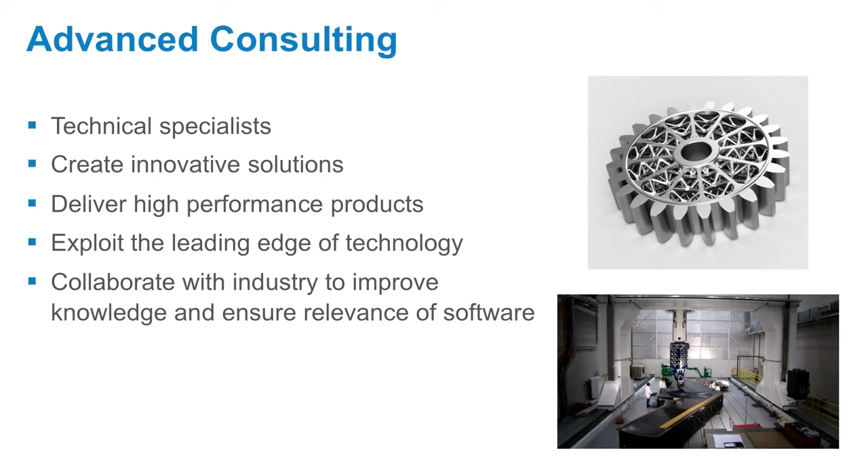By collaborating with industry, we're improving your knowledge and also ensuring our software stays relevant. So here are some of the areas we work in: adaptive manufacturing, robotics programming, additive manufacturing, build verification, inspection, composites design and manufacturing, sheet metal nesting, and we also do subtractive manufacturing.

In my team particularly we work on the additive side, and as part of that we do a lot of design: topology optimization, lattice optimization, generative design. We're going to learn a bit about both of those today. We also do build preparation, additive build simulation, and some material science and testing.

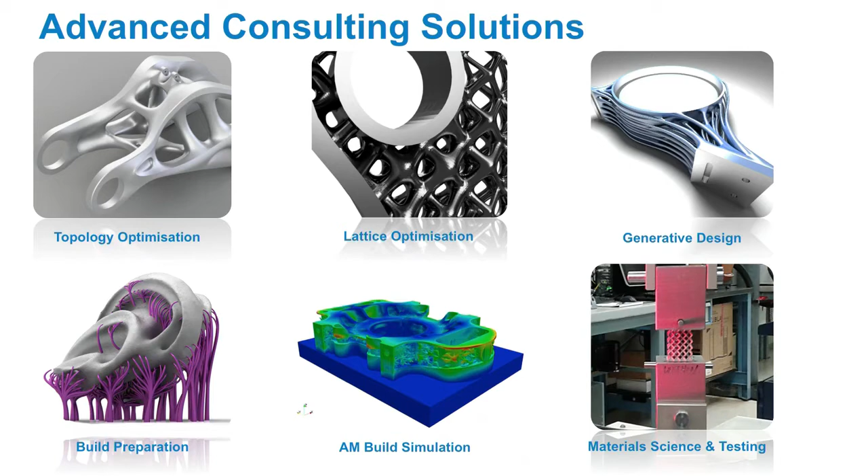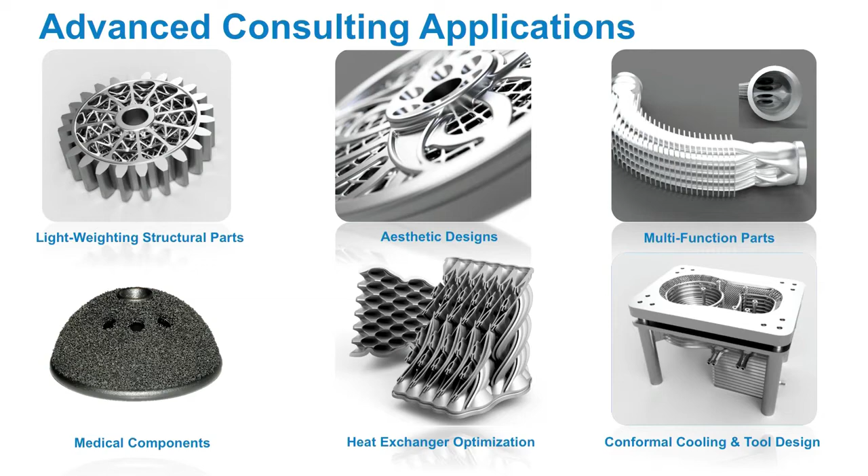So these are the main areas we work in: lightweighting of structural parts, aesthetic designs, multifunctional parts, automotive components, aerospace, medical, plus other areas. We also work on heat exchangers and tooling.

Great, and I hail from a different research wing of Autodesk over at Pier 9, which is a 27,000 square foot research facility we have in downtown San Francisco. I'm a principal research scientist there based on our Netfabb team, looking primarily at how we can use additive technologies in a way that is both economical and practical. There's a lot of excitement around these technologies, and we're spending a lot of time looking at how we can use them very strategically.

So at Pier 9, it's an interesting facility, one of several digital fabrication workshops we have around the world. We have a focus on digital fabrication, robotics, and we do a lot of workflow research. One of the more interesting things we have is a residency program to bring individuals from industry in to work with our new generative design tools, to work on manufacturing, as well as to work on some very social impact challenges.

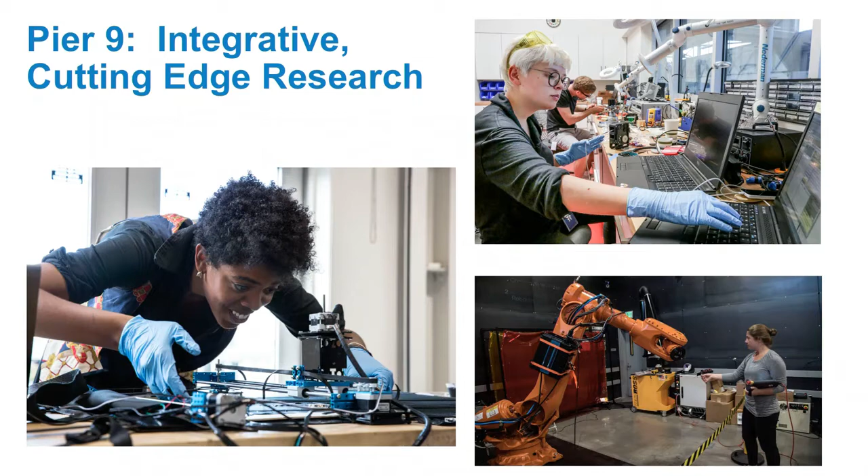One of the most unique things about the research we do at Pier 9 is it's really focused on integrative and cross-disciplinary work. We're looking at new ways of training robots, new ways of making robots build structures, new ways of embedding computers on the body via conductive textiles and embedded computers. We're really looking at how we can combine existing technologies and advance them with just little leaps in combinations.

So today we're going to be talking about one of these combinations of new technologies and old technologies. We're going to be talking about metal casting, which is the technology used to produce every part on the table. There's no 3D printed parts on this table. Afterwards, during Q&A, we'll pass some of these around so you can handle them, take a closer look.

So Andy here is going to give you guys an overview of some of the generative design and lattice optimization capabilities that we're leveraging to really drive this manufacturing process. And I'll be talking a little bit more on the manufacturing side about how specifically two metal casting processes work, and some of the design considerations for actually making parts for both investment casting, which is what was used to make this magnesium lattice seat frame over here on the right that Andy designed, as well as sand casting, which was used to make the LS-218 swingarm down on the show floor, which you'll all be able to see later today, as well as a small prototype Hack Rod chassis up here.

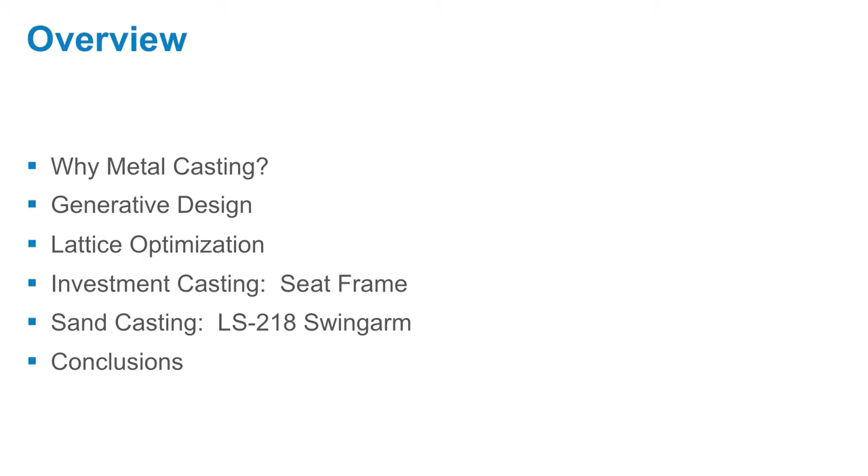So with that, I'll hand back over to talk about why we should actually look at metal casting. It's a 5,000-year-old technology, and for all intents and purposes is associated with a lot of old, crusty, heavy industrial equipment. But in fact, we all flew here on airplanes with engines made out of investment cast parts. Most of the hot stage components of turbines are made out of investment cast parts.

So it's actually a pretty interesting technology. And when we take a look at what's been driving a lot of the excitement around metal printing, we see that it's a lot of excitement around part consolidation, around these very high performance structures, very difficult to make geometries, and then a lot having to do with agile manufacturing.

And if we break that down, we're looking at value generation through design and value generation through logistics. And what's exciting is when we look at those three design headings, that actually overlaps really strongly with the capabilities of modern metal casting techniques.

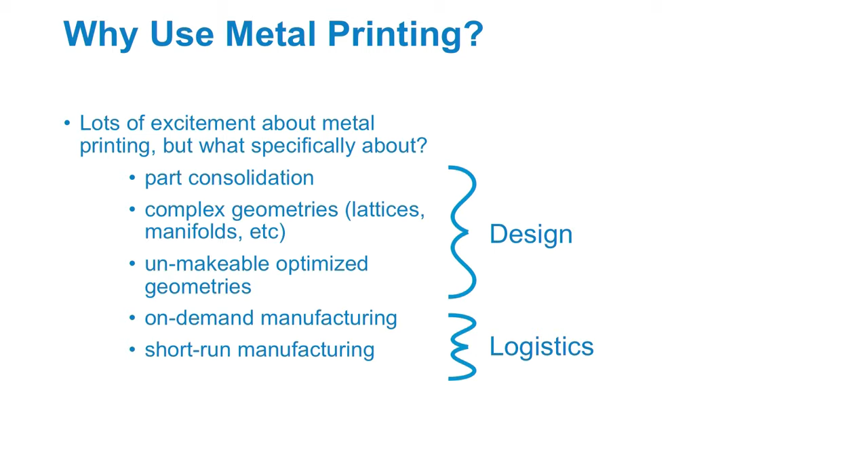So metal casting is a $35 billion industry. It's widely distributed. Most interestingly, it's a well understood process. It's a mature manufacturing process that produces parts that are certifiable, that are qualified for aerospace and medical use.

And it offers a huge portfolio of materials, hundreds of different alloys. So a much wider variety of materials that we can work with than can currently be used with conventional metal additive. Additionally, it also supports custom materials, so you can formulate materials for specific applications. So there are a lot of really interesting things going for casting, including the fact that it can make incredibly large parts.

So really the three technologies that we're talking about combining today are generative design optimization and using 3D printing, not as the end part manufacturing process, but really as a critically enabling technology to capture that geometry, and then using metal casting to actually realize that geometry in a material of interest.

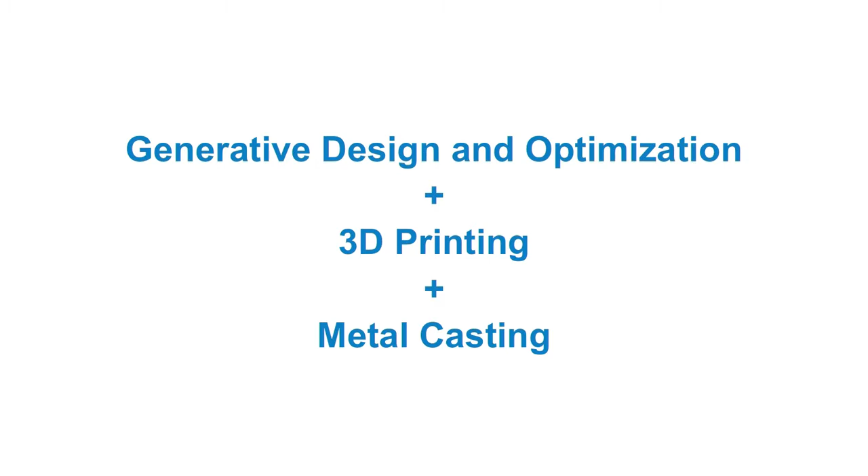So with that, I'll hand things over to Andy to give you guys a bit of an overview of our generative design and optimization capabilities.

So we're going to see a bit of generative design, basically a piece of software that is currently on tech preview. So the idea behind generative design is quite simple: it's define, generate, and explore.

So we start by defining. What we have here is a suspension upright. We have the green bits, which are our preserved regions. We have the red bits, which are our space claims. And what we do is we set up our structural loads on there, and then we work through our manufacturing constraints.

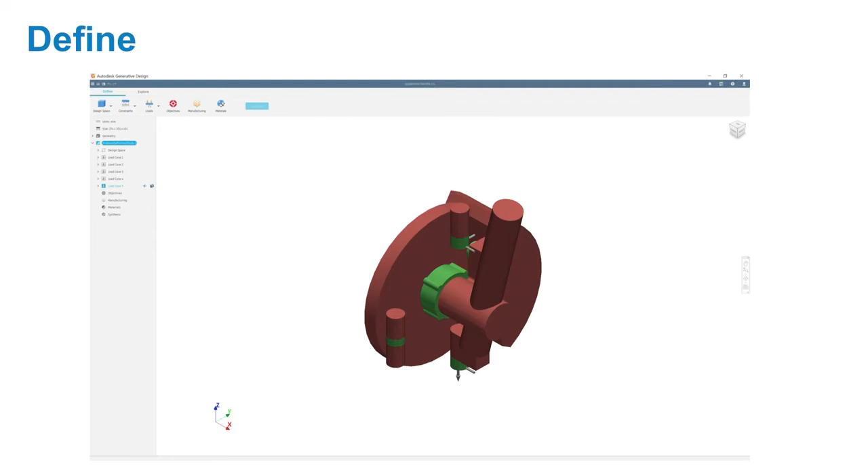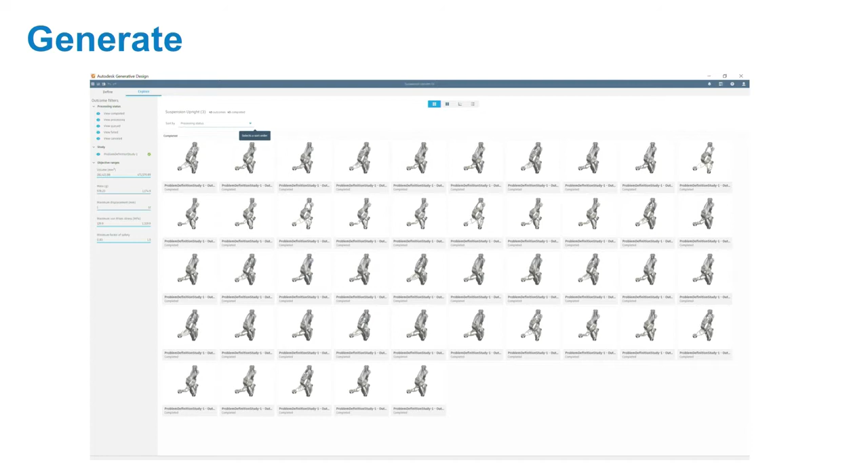Our material options, and basically we then generate quite a lot of solutions from that. So in this case, I've generated 45 designs. So from that, we need to basically work out what are the ones that best meet my needs.

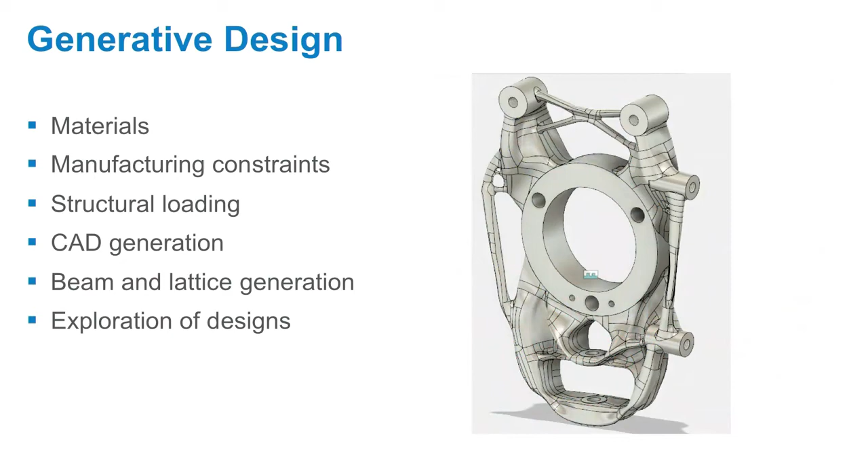So this is something that we're using generative design to do within the advanced consulting team. We're looking at comparisons of materials, manufacturing constraints, applying structural loading, generating our CAD from that. We can also look at beam and lattice generation. And one of the main benefits of the software is exploration of designs.

So here are some parts that I designed from this. We have 3 different materials here, so we've got 3 different designs. These solutions, we could additively manufacture, or we could even cast them as well.

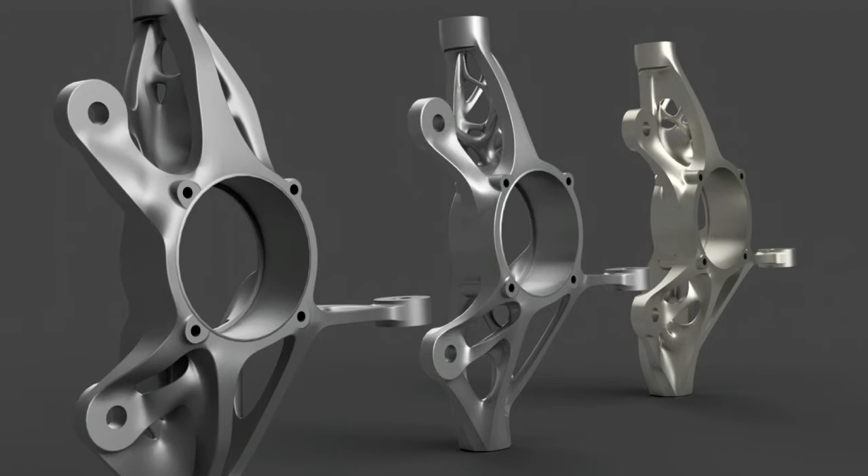So here is another suspension upright for a high-performance vehicle. It's looking at the rear of it, looking at the front.

And this is a structure used for the handlebars of a BMX bike. This bit in the middle here is actually developed using the Autodesk Monolith software, which is a multi-material generative design software. But the bit on the end in silver, that is what was generated through generative design.

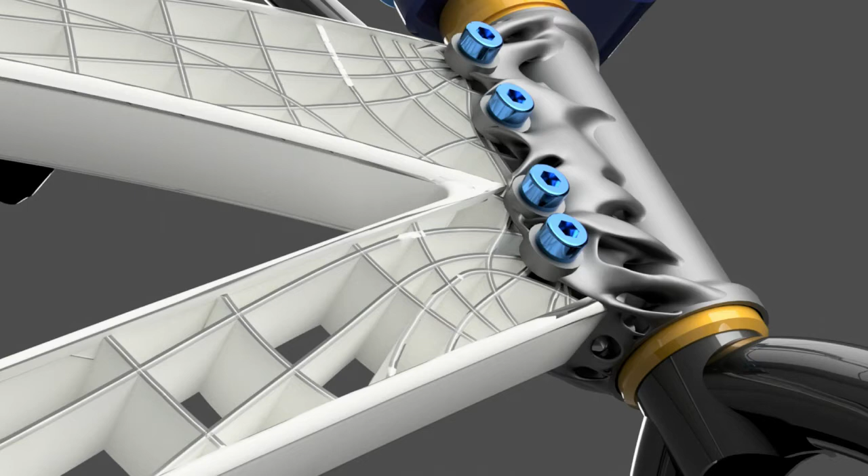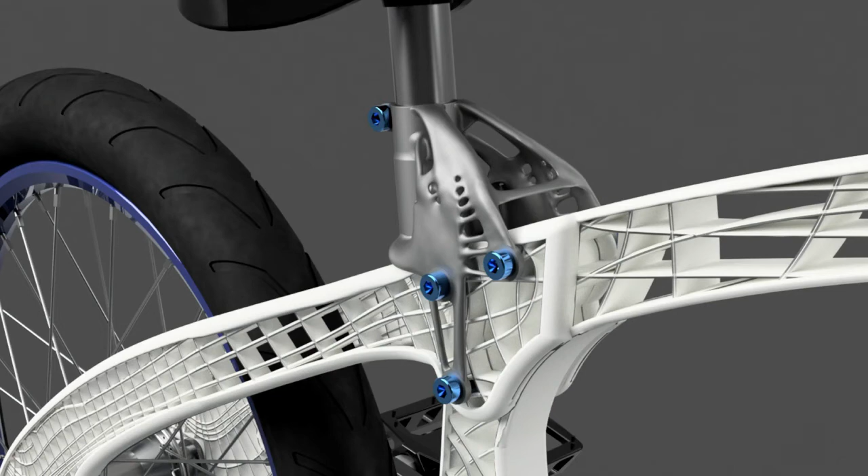It's another image. So here is the same bike, but with the seat frame now. That's the entire bike.

And we actually manufactured this. So it's got a composite polymer frame with 2 aluminium structures for the seat and the handlebars.

We can use this software to also do architectural designs, so don't think just automotive and aerospace. We can do some very cool things with architecture.

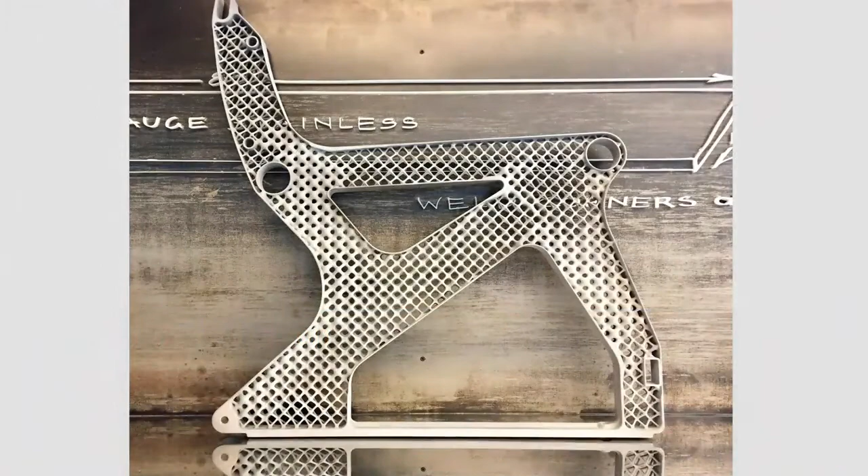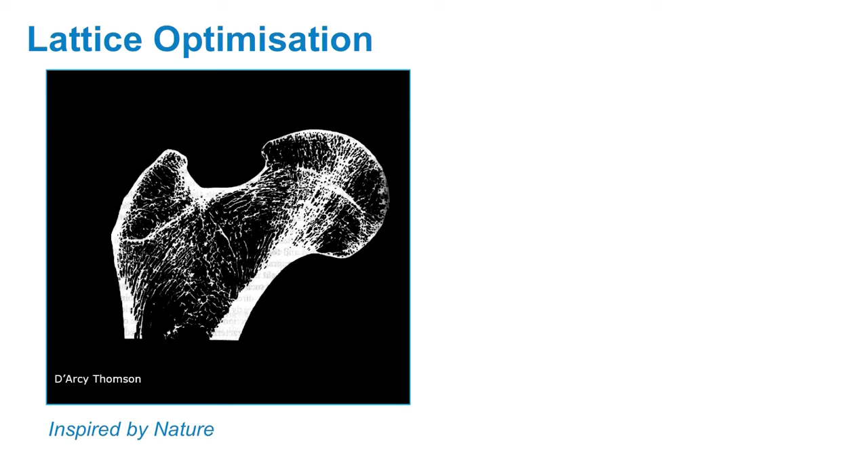So the idea behind lattice is basically inspired by nature. We have an X-ray of a femur bone, and you'll see inside there we have a very porous lattice-like structure, and around the outside we have a varying thickness skin. This is basically to enable you to have very high stiffness and low density.

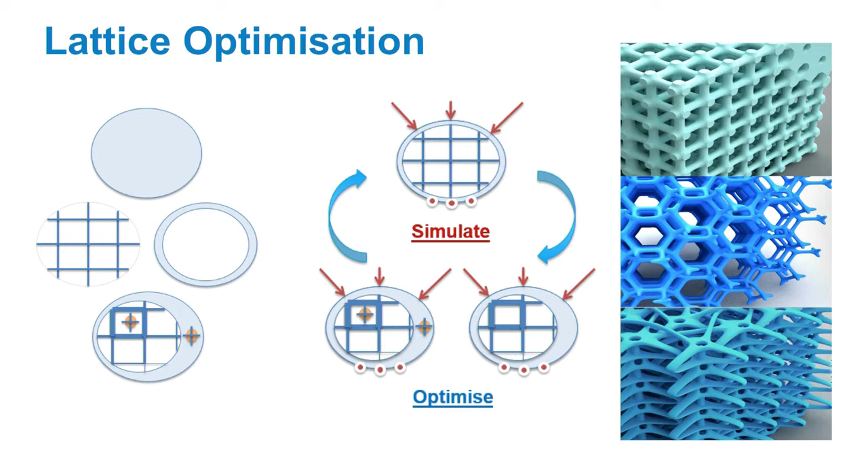So the software that does this is Netfabb. In Netfabb, we're able to define a lot of different lattice topologies. We can build our own custom topologies in there, and we can manually optimize those here, or we can automatically optimize using our structural loads. And this is all being done through Nastran.

So the benefits of lattice structures is you can get thin wall structures, so they're all supported with the lattice. Lattices will limit crack propagation, so if a beam fails, it does not propagate through the entire system. You can get very high second moment of area, which means very high bending stiffness. You can get very lightweight designs.

And during the additive manufacturing process, you'll notice that the residual stresses in the part are a lot lower, so you get a lot less deformation. And you can control the structural behavior of the parts. So you can create very interesting features such as negative Poisson ratios, so there's auxetic type structures. You can control exactly how the structure behaves in certain ways.

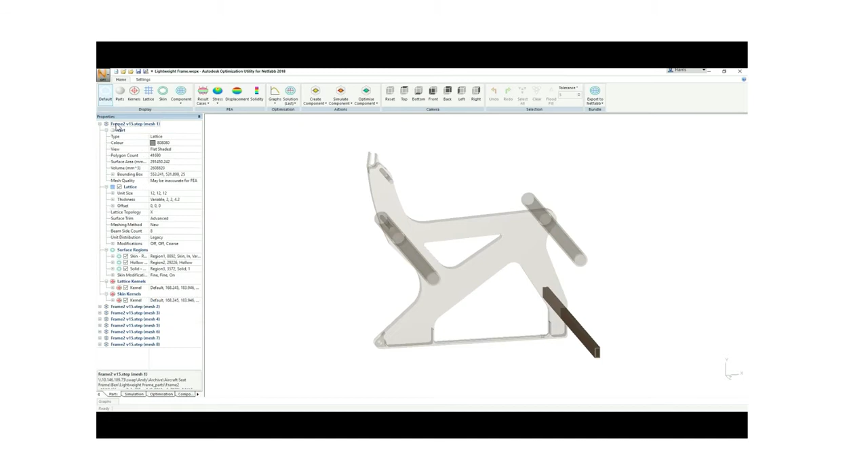So I've got a video here. It goes quite quick, but I've got some stills of this afterwards. So what we're doing is we've brought in our parts as a multi-body component. We're setting up our bits that are solid, setting up bits that have got lattice in there, and setting up the range that those operate within - the upper and lower range of the thickness that it's going to operate between.

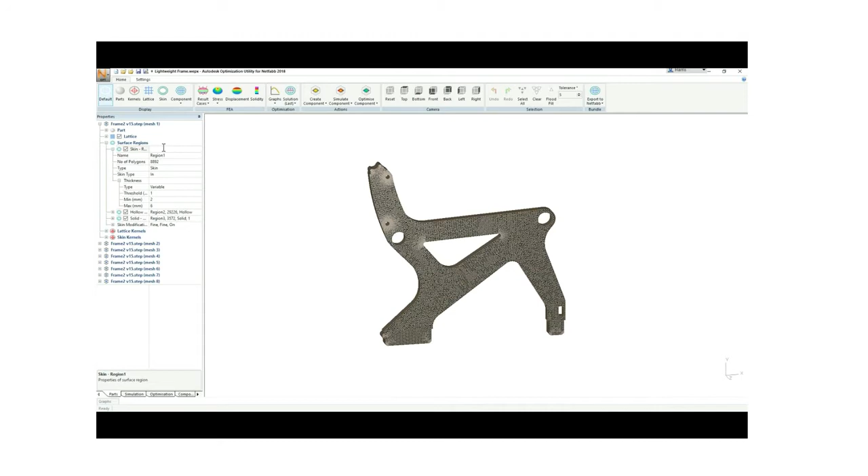And I'm just setting up the skin thickness now. So you can just see there, it's just around the outside. So that is the unoptimized structure.

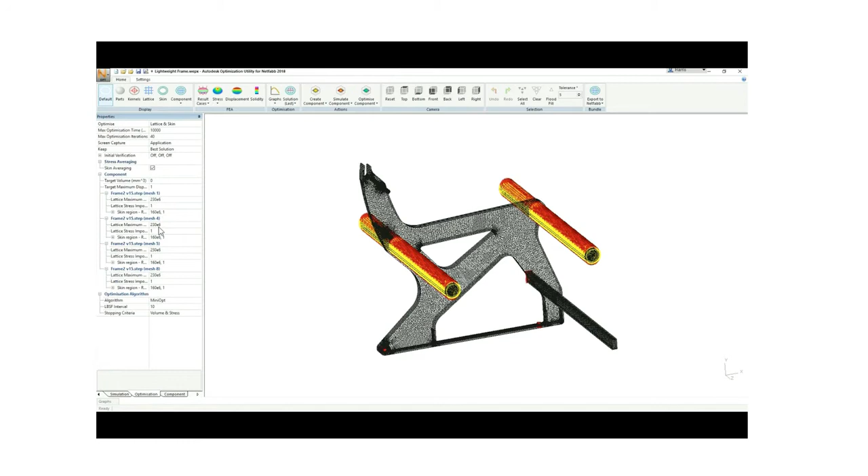So I'm setting up the boundary conditions. So I've set up a symmetrical structure here. We're imagining 3 seats, 2 seat frames. The loads are on all the bars, so your seat's on the lower bars, the seat back is on the upper 2 bars. And I'm setting up a number of load cases for this.

So just to show you a little bit more clearly - on the left here, we basically work down, developing our range of lattice thickness, and we set up the skin thickness. So you can see here, a little bit more zoomed in. I can set up the cell size as well, and I can stretch that in any dimension I want.

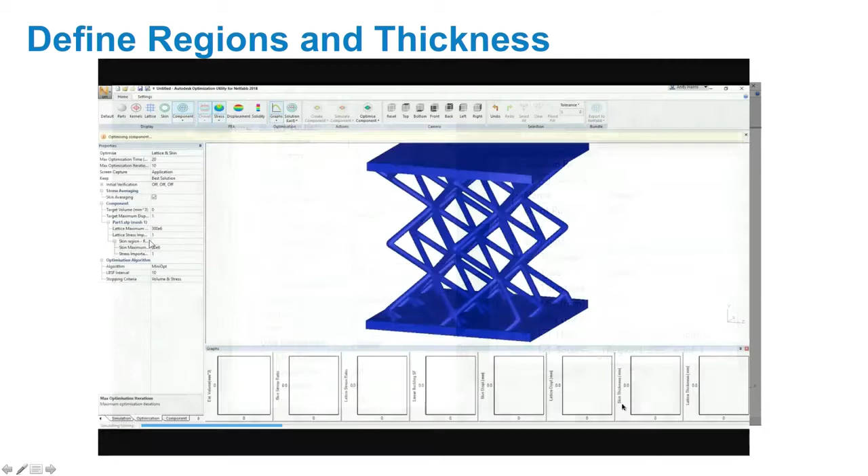And then we can optimize the thickness of this. I can also set up the surface thickness. So it just gives you an idea of what happens during the optimization - it's varying the thickness of the skin and varying the thickness of the lattice.

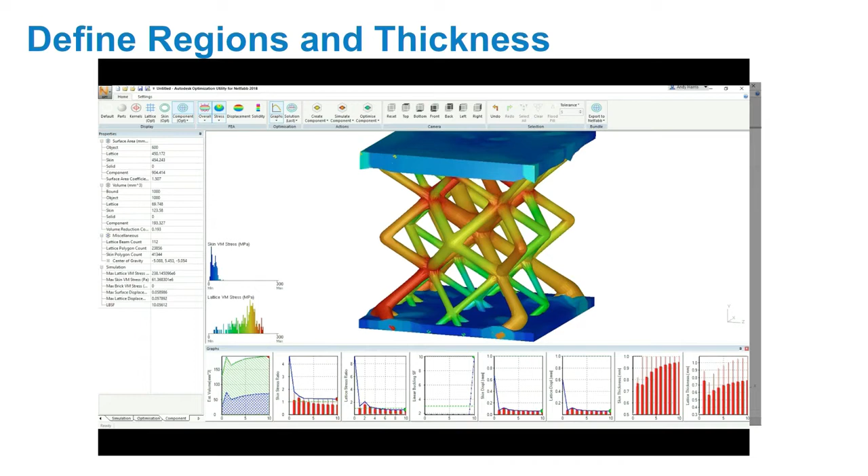And this is a final part, but you can come and see this one up here. So part of what we do in our team, we also do verification of the models. We can generate these solutions very, very quickly using Beam and 2D elements, but we want to verify that these really are the stress that they are actually at. So we do a 3D mesh of this geometry. You can see here a very highly detailed 3D element model. And we verify the stress - it is a lot lower than the yield.

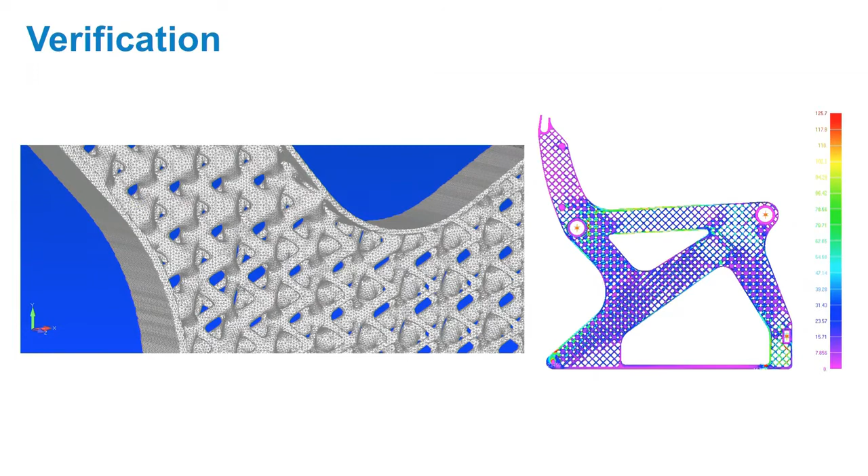So I'm going to pass you back to Andreas.

All right, so we're going to talk about how we actually made this seat frame, and it's worth noting there are very few metal printers in the world that can fit an object that large. Just quoting it out at someplace like Proto Labs, we would have had to chop it into 4 different pieces and then figure out how to weld together all of those lattice nodes afterwards, which just isn't practical. And likewise, we certainly can't use materials like magnesium in metal printers.

So the investment casting process, it's a positive mold process. You basically make a sacrificial copy of your object in a material like wax or plastic. And then you take usually multiple copies of that object, put it on another piece of wax called a tree, and you build up a ceramic shell - basically build up a temporary mold around those wax patterns.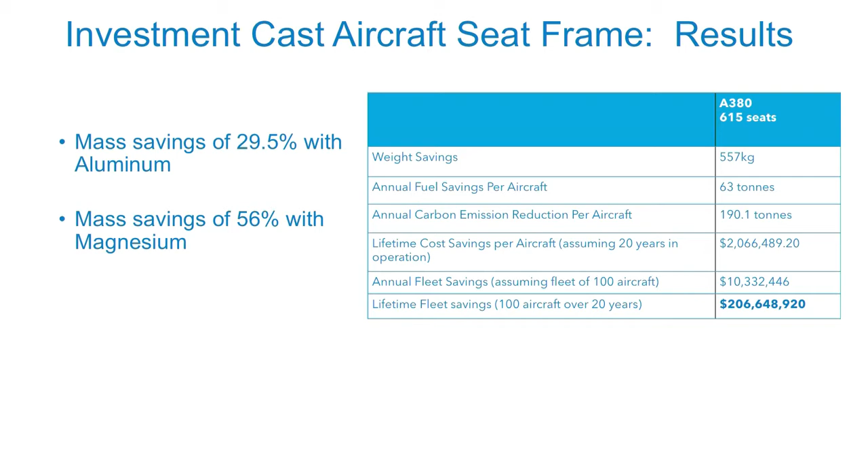If we take a look at a seat frame, it's a relatively small part, but there are hundreds of them on commercial passenger aircraft. Looking at some of the biggest aircraft and fleets in the world, say Airbus A380s, which have a little over 600 seats and kind of maximum passenger capacity, we end up saving a little over $200 million over the lifetime of a fleet of, say, 100 aircraft, which is pretty exciting.

Looking at the costs, this was one of the things that's pretty exciting. Casting's pretty cheap. This is about 3 times cheaper than a conventional metal printing process, just in terms of looking at laser time. So at prototype quantities, we're looking at about $4,000 per seat frame.

When you start to run the numbers on making larger quantities of these, what's interesting is you can pack these volumetrically, which is another economy of scale you can't achieve with metal printing, where you don't really do much 3D packing. You can actually pack up to 80 of these seat frames into those VX1000 build chambers. It takes about 72 hours to print the entire chamber, but you're averaging a little under 1 hour per pattern. So we're actually moving through this process pretty quickly.

Additionally, the general impression in the industry is that casting is a very slow process, but that's only slow when you're cutting tooling. It's actually extremely fast. You can go from printed pattern to part in about 8 hours using some of the modern high-speed investment casting shelling techniques.

There are certainly a lot of interesting characteristics of the casting industry. There are a lot of misconceptions around the turnarounds and lead times that are largely holdovers from using conventional subtractive processes, which are really the rate-limiting step when you're making tooling for, say, molds for wax parts or tooling for sand molds, which we'll talk about in a minute. That being said, typically you're quoted about 3-4 weeks for investment cast parts, but oftentimes if you pay an extra 15-20%, you can get turnaround times as low as 2 days.

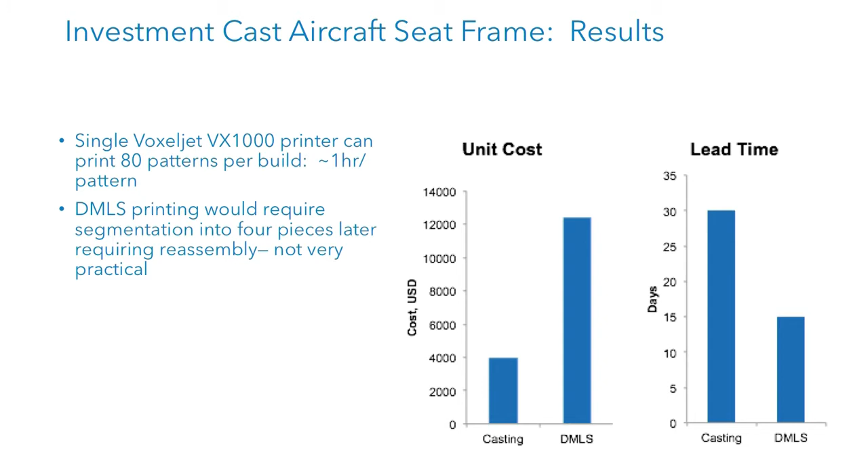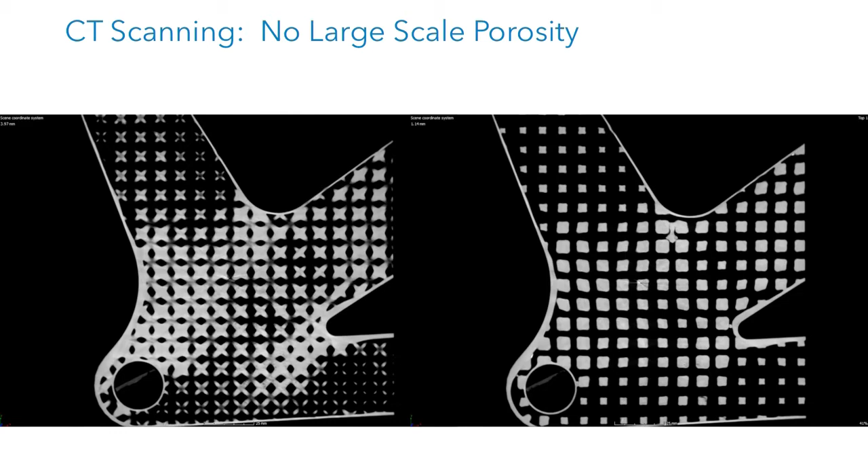So it's pretty exciting. We also ran some of the castings that we did through a CT scanner and X-ray just to check for some of the traditional casting defects. What we're looking for here is porosity, which can manifest at a couple of different scales, but we're excited to see that there's no visible porosity using existing conventional inspection techniques.

In terms of actually designing for this process, this is a little bit different than designing for, say, a direct metal additive process. What's important is that you have to design for the entire process, for everything that's going to occur between CAD and finished parts. The joke in the casting industry is that people don't buy castings, people buy parts, and a lot has to happen to a casting to get it to be a useful part. So in addition to designing for your functional requirements during service, you also have to design the parts with shell buildup in consideration, shell removal, design for the actual casting process, as well as consider heat treatment and machining steps.

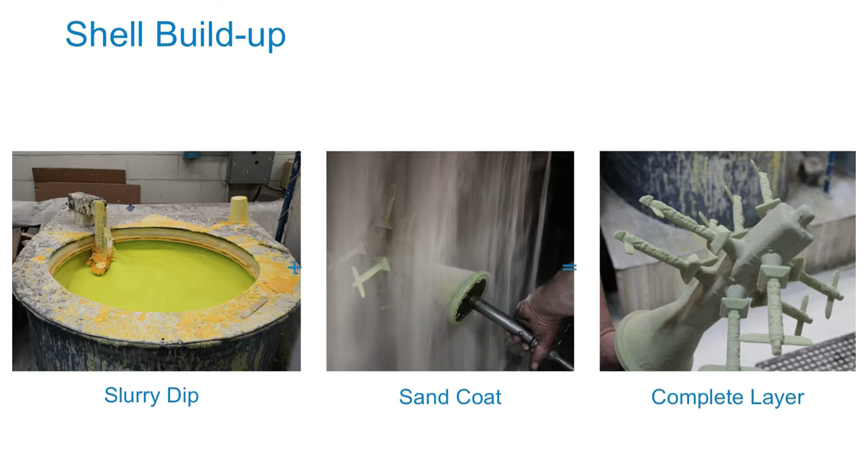The shell buildup consists of that slurry dip and then that sand coat to build up that complete layer. We generally go through between 4 and a dozen layers. What you want to think about here is we've got 2 mechanisms: a fluid flow challenge of getting that liquid ceramic slurry to coat every surface evenly to correctly build up that mold wall. It's important to think about that we're constructing that mold, so we're building up the mold. You want both components, the sand and the slurry coat, to have access to that part.

So the structure that you're making has to, in addition to being stiff enough to satisfy the requirements of its service life, also has to withstand the process of being submerged into that ceramic slurry, being rotated, being handled when it's realized in a much more delicate material.

These printed PMMA patterns are kind of the consistency of a sugar cube, a little bit lighter, so you can definitely scratch and abrade material away with a thumbnail. And it's relatively brittle, so very fine, thin features will break. So that's something to definitely keep in mind.

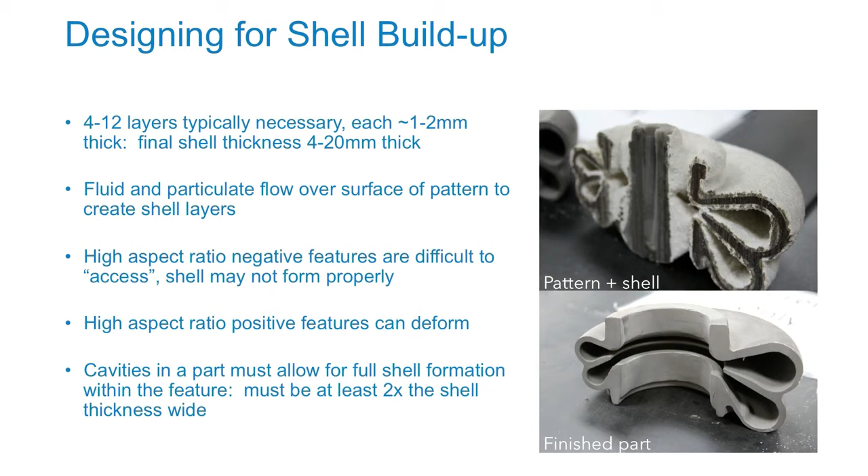Probably one of the most interesting and important things we learned exploring these lattice geometries is around negative features, so cavities in your geometry. As a shell is built up - this is just a part of a three-dimensional lattice geometry here - you can actually see the 9 individual layers of that shell, of the ceramic slurry, and then the back coat of stucco here.

And what's important is to make sure that all of those negative features are at least twice your shell thickness, so that you can build up a complete shell. Because otherwise you're going to essentially end up with a defect in your mold.

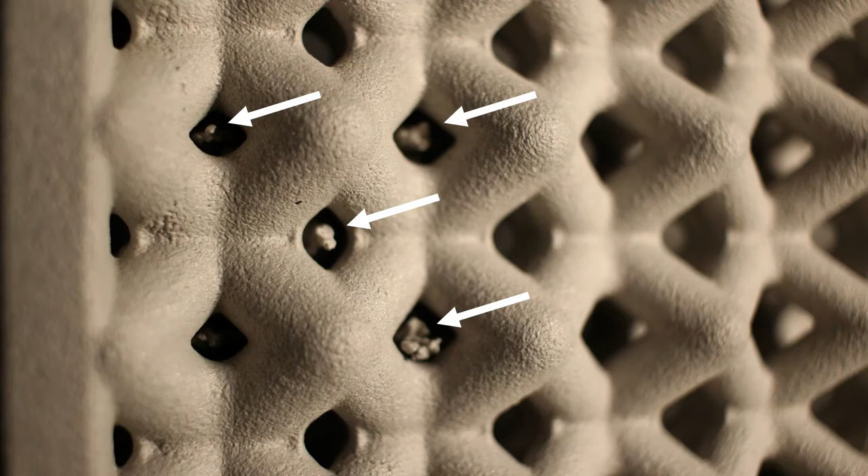What that looks like, you can actually see this part afterwards when we go to questions. If you don't build up a shell of correct thickness, you're going to get a fracture, and metal is going to leak into that inadvertent mold cavity. So what you end up with are these weird little nuggets of metal trapped in a lattice geometry like this. This is one of the early seat frame prototypes where we didn't have those negative features properly sized, so we got defective shell formation in those cavities, and got these little nuggets of metal in there.

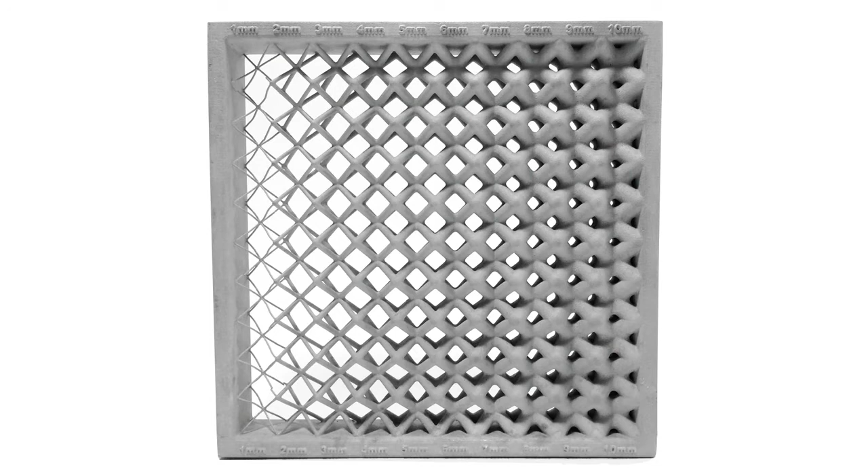So we did a test piece here, a couple of these test pieces, to come up with some basic design rules. We generally found once you have cavities above 13 millimeters, you have plenty of access. But we were doing a body-centered cubic lattice cell here, 20 millimeter unit cell. Once we had struts below 2 millimeters, we started seeing those struts breaking during the pattern portion of the process.

And likewise, when we went to higher relative densities, so on the far right there, struts of greater than 8 millimeters, we started getting below that twice the shell thickness criteria, so less than 8 millimeters cavity size. We started getting incomplete shell buildup there and getting defects.

Another important aspect: designing for deshelling. This is a lattice cube that still looks like this under my desk, because after an hour and a half in the sandblaster, we're not able to get the shell out of that. So you want to think about how you're going to get the shell out of your parts. You want to think about lines of sight, because you're going to be using generally high velocity abrasive media or water jets to get it out. So you want to make sure that you can see every piece of the shell that you want to abrade.

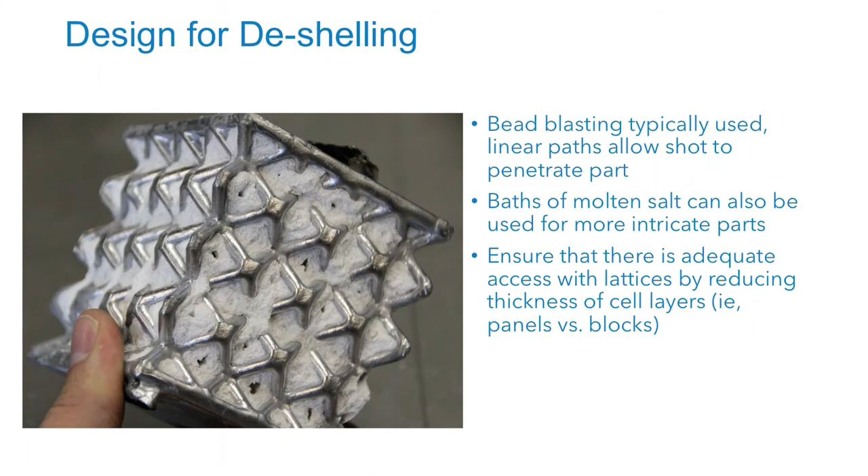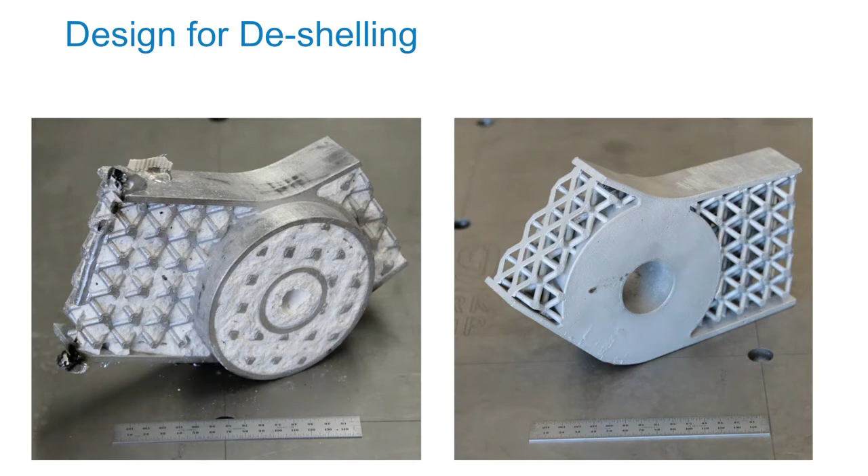That being said, there are some exceptions to the rule. You can also pay a lot of money and have your part thrown in a bath of molten salt that will actually dissolve the ceramic, but that adds quite a bit of lead time and cost. So generally we found sticking to 1 or 2 layers of unit cells is a pretty good rule of thumb, and also abiding by those negative feature and positive feature rules to make sure that your positive features are going to withstand the whole process, and that your negative features allow for full shell buildup.

Additionally, the casting process itself comes with a lot of its own design constraints. We're working with a process that involves a phase change, so there's a densification that happens, and there's a lot of considerations around fluid flow and heat exchange.

So thin features are going to cool more quickly than thicker features. And you likewise also want to minimize the turbulence as that metal flows into that cavity, because metal has momentum, and that momentum is going to be transferred to the structure of the mold. We're working with a relatively fragile mold here, so you want to keep that in mind.

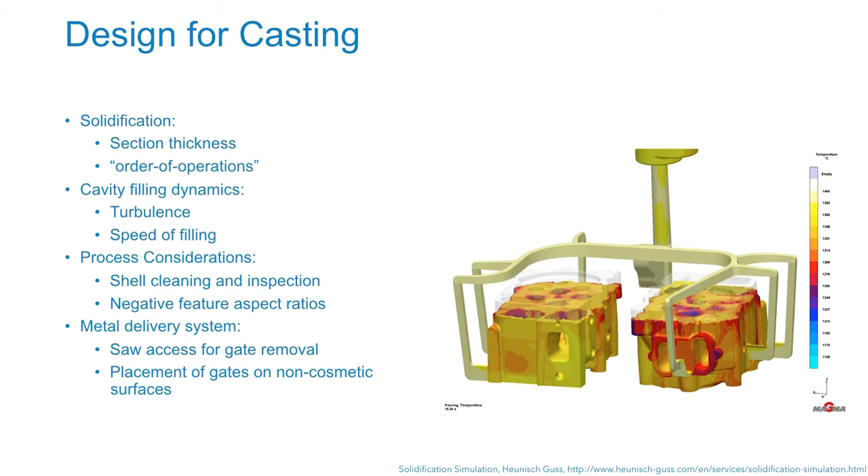You also want to maximize the speed with which you fill that cavity. So there are a lot of considerations, and generally it's best to work closely with your partner foundry to really talk through the details of the casting process to best understand how that affects the design of your part. Finally, as with most near-net shape processes, we're designing with some sort of post-processing in mind, generally heat treating and machining.

So you definitely want to think about whether you need to add fixturing features, any kind of tie bars or anything. If you have features that are quite distal to each other that are high tolerance, you might want to add a tie bar so during heat treatment those don't wander too far away. So that's another thing to consider in terms of full process planning.

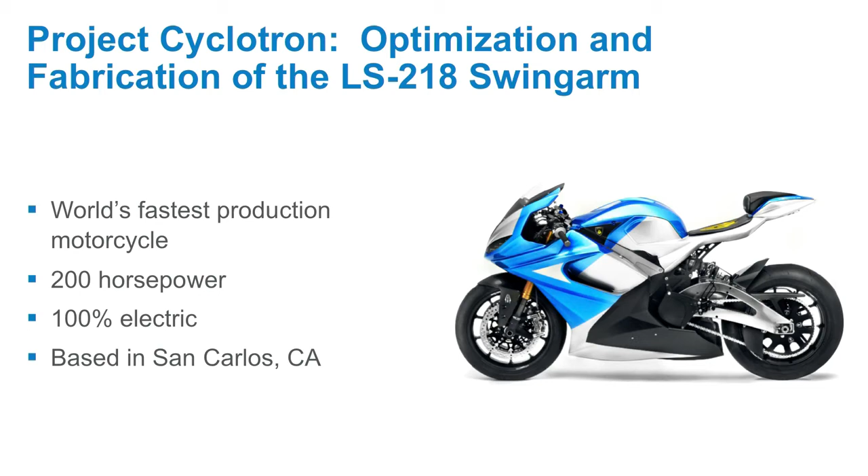Next we're going to take a look at another project, switching gears to sand casting. This is working with an outfit called Lightning Motorcycles. They're based in San Carlos, and make a 200 horsepower electric motorcycle that is the fastest motorcycle in the world. It has some really interesting characteristics due to the fact that it's an electric motorcycle, and we can talk about some of the momentum physics afterwards.

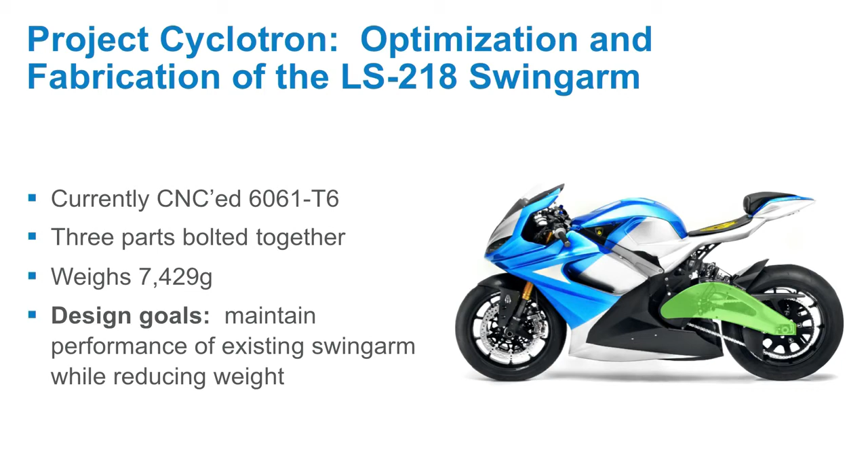It's pretty neat. We decided to take a look at the swing arm on this because it's a high performance application. Currently it's 3 pieces of billet CNC 6061 bolted together, composing that swing arm. It weighs just under 7.5 kilograms, and what Lightning wanted out of this collaboration was to maintain part performance while reducing weight. So let me go ahead and play the video here.

Now is the video playing? There we go. So we loaded the bike up into Fusion, isolated the swing arm, and then extracted the geometry that we used to actually run the generative design synthesis here.

So we basically have the bearing races for the motor mounts, the suspension tie-ins, the axle mounts, go through, select the materials and manufacturing processes we'd like to explore, and then we generate that huge variety of options here, basically doing that matrix of manufacturing process and material.

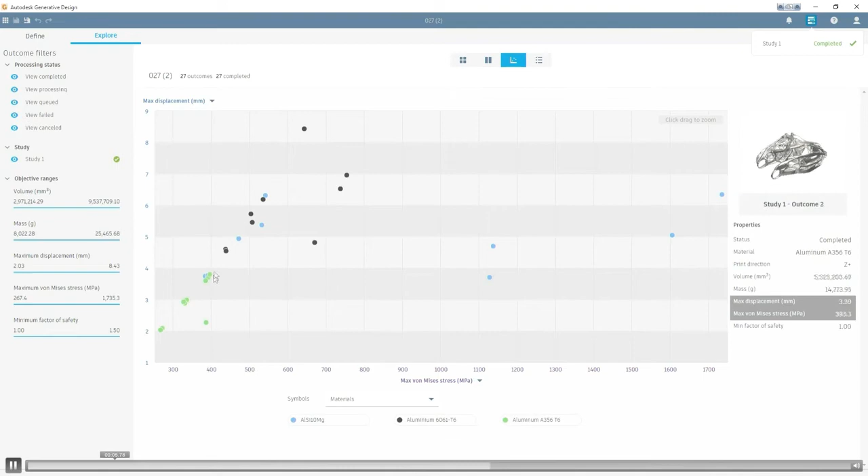And then we can go and interrogate all of those different options, those hundreds of different options. We can look at deflection, we can look at von Mises stress, and we can really look at all of those compared to one of our most important criteria here, the weight.

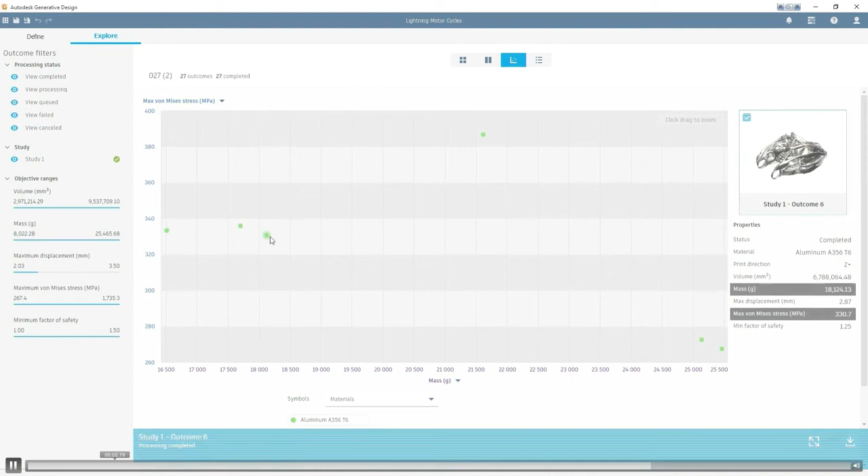So let's go ahead and take a closer look at what that generation process looks like here. Just exploring a bunch of the different options using different materials, what that synthesis process looks like. And then we took those results, threw them back into Fusion to do the actual validation studies.

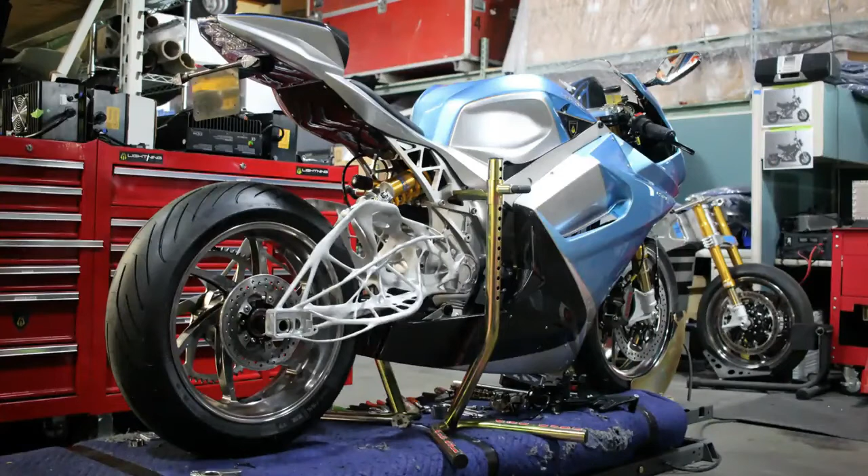So you can actually go see this bike. It's down on the show floor, and you can also see the sand molds that were used to make that swing arm. We're pretty happy ultimately with the performance. We're able to match to within about 15% performance on all of the primary load cases, except you can see for the middle one a big deviation, but that's actually because we're 50% stiffer.

So in this particular load case, this means that the acceleration that you get as the electric motor kicks in and yanks the chain, applying a kind of vertical torsion to the swing arm, the swing arm deforms significantly less. So we're pretty excited about that.

So again, this geometry was made using 3D printing to augment the casting process. Using voxeljet, this is actually one of the largest 3D printers in the world. They're printing sand, so they're using that same powder and binder process, but instead of printing a plastic sacrificial material, we're printing a material that will actually withstand the heat and temperature of the sand.

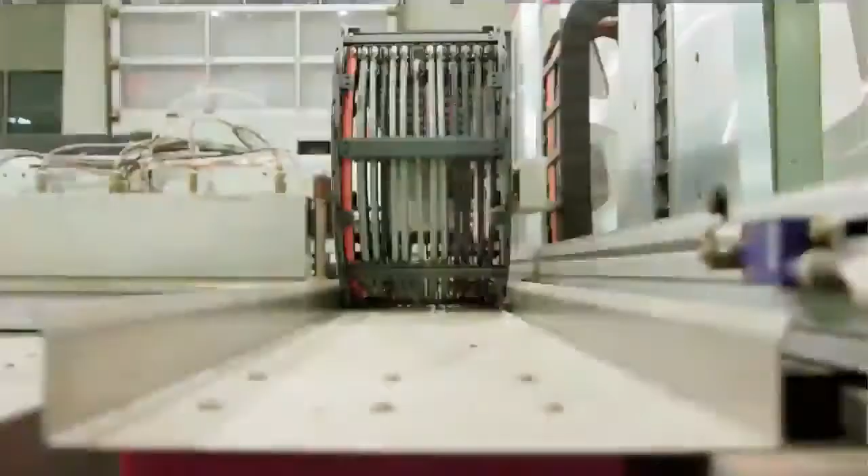These are 2 different kind of mold configurations here. There's the sandwich flavor of mold, in which you basically take a big volume of sand, Boolean out your part, and then just add some slices and alignment features so that you can actually assemble this. So you can see this very sand mold downstairs.

And then for the Hackrod, which we have up here, we used more of a traditional mold making process in which you actually have a 2-part mold with a core structure. So we're really defining all of the surfaces, external and internal, using that approach.

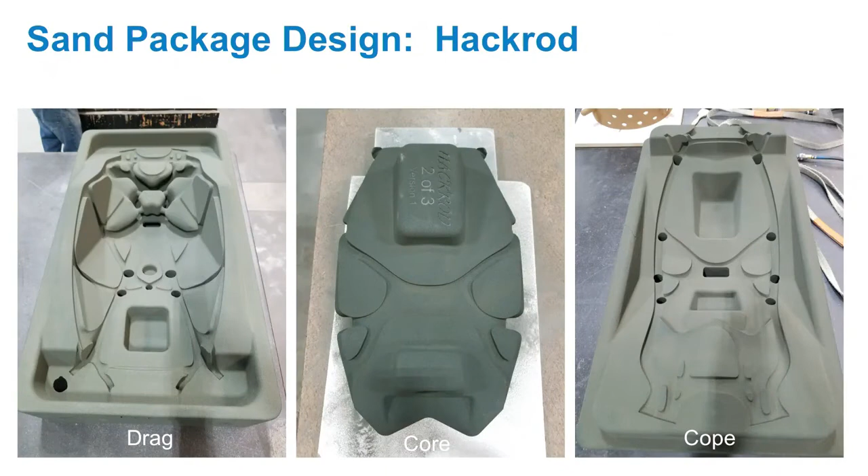To show you in a bit more detail, this is what a typical sand mold, specifically the sand mold that we used for this Hackrod, looks like. This is actually the mold for the big brother of this one, which weighs 40 pounds. This one weighs 11 pounds, so we took it, it's a little easier to carry.

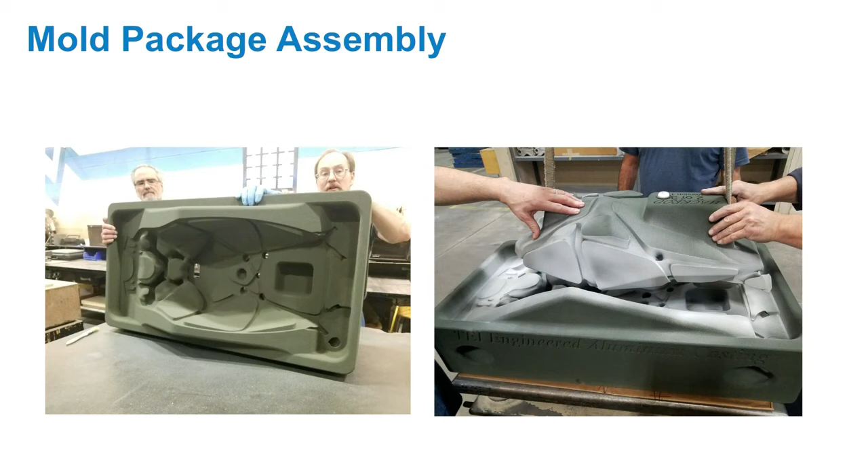So they're assembling the mold here. You can see that core inside the primary mold. You can see holes here for load straps to actually move these pieces of mold around. And you can also see that there's a little bit of metadata information embedded into those mold components.

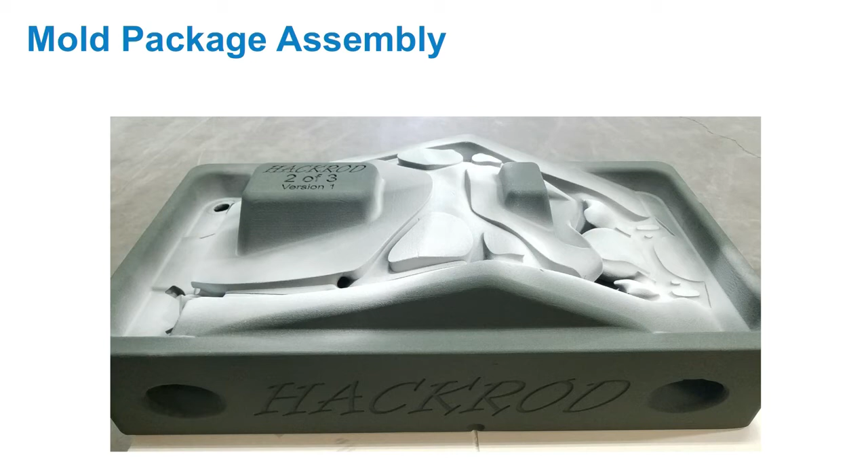So there's a lot of opportunity to ensure that you're pouring the right alloy, assembling the right molds, working with the right version of the geometry, which is quite nice.

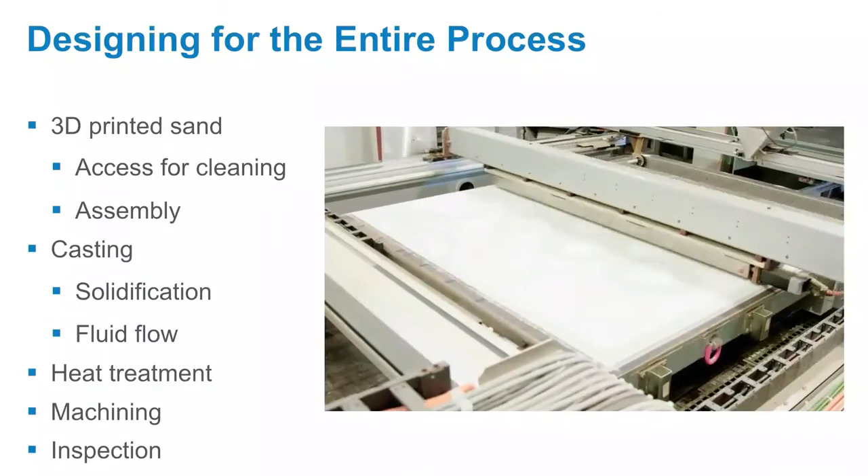So again, the idea here is you have to design for the entire process. This is a tour through the facility where this was made, and they have both heat treating, machining, and inspection services in-house. They actually have probably almost 60 multi-axis machining centers there.

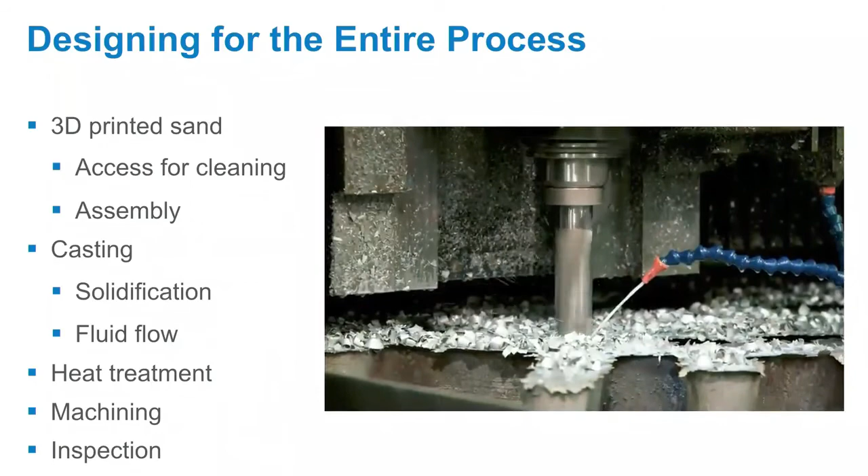So you want to design for your 3D printed sand mold. You want to keep in mind that you're working with a somewhat brittle, very dense, heavy material. And you want to design again for those casting rules, design for heat treatment, design for machining, and then also keep in mind inspection. That first version of the Hackrod we made didn't actually fit in their CT scanner, so we don't know what's inside it. So something to keep in mind.

So working with printed sand, again, it's really heavy stuff. You want to make sure that your molds have alignment features and that you're designing with that in mind. You're basically making synthetic sandstone here. So you want to make sure that you're not doing extremely fine features. We'll talk a little bit about feature scale in a minute.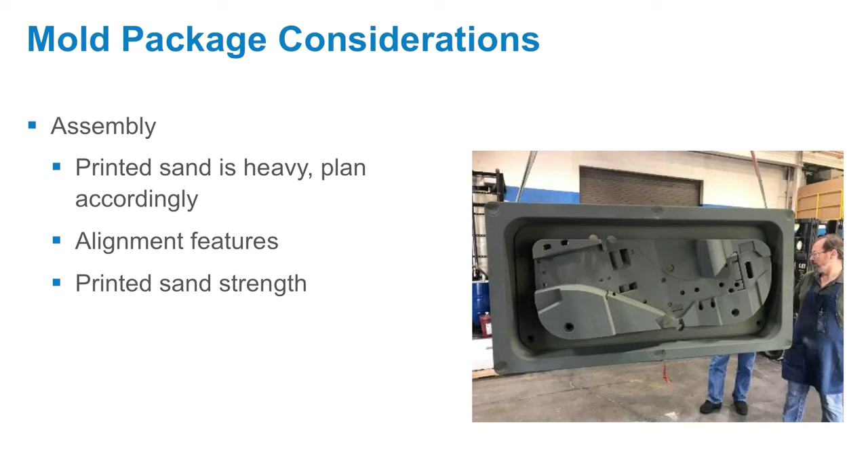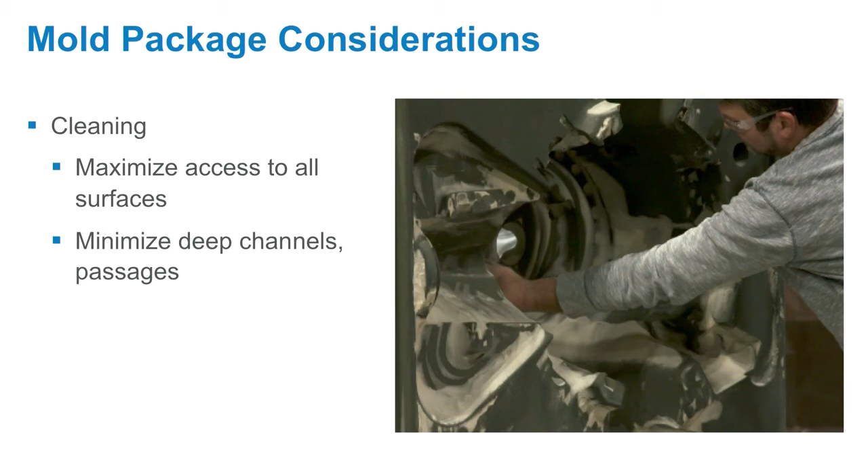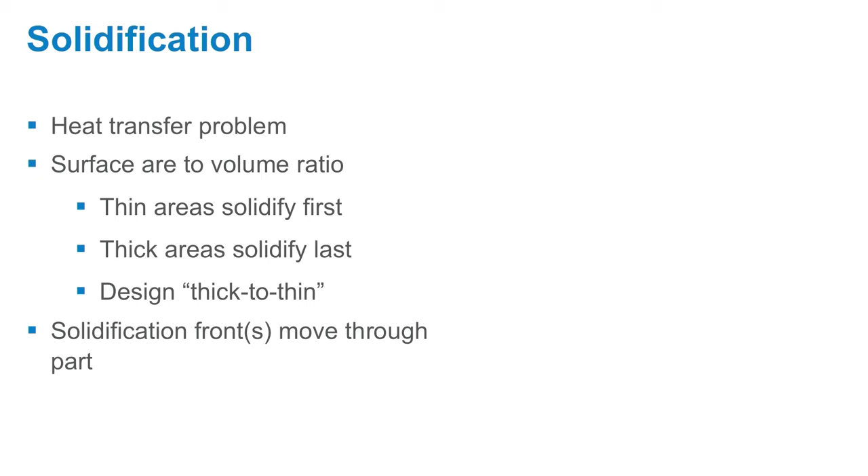So again, solidification, it's this heat transfer process. It's the process of that material transitioning from a liquid to a solid. Generally, you'll work with your foundry to kind of optimize your design to interface with their gating system. But we can take a look at what solidification looks like for the actual swing arm here.

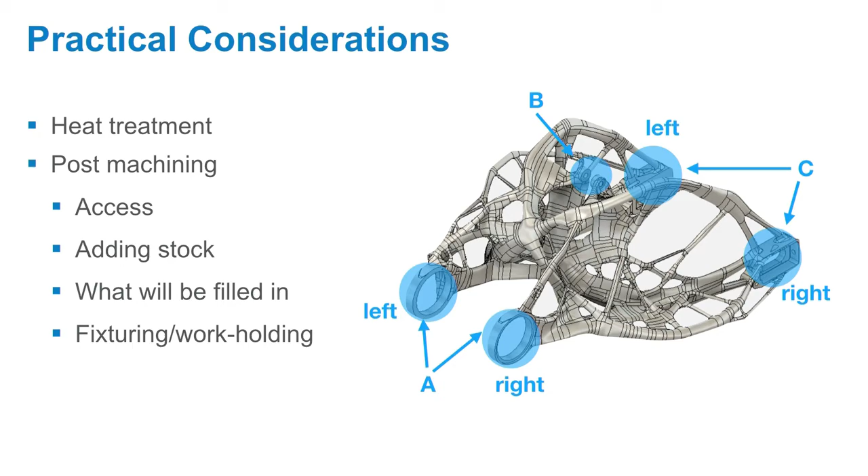So for the post machining, we had to think about both machine access and also add stock to all of those precision surfaces that we're going to machine down, and also think about fixturing and work holding.

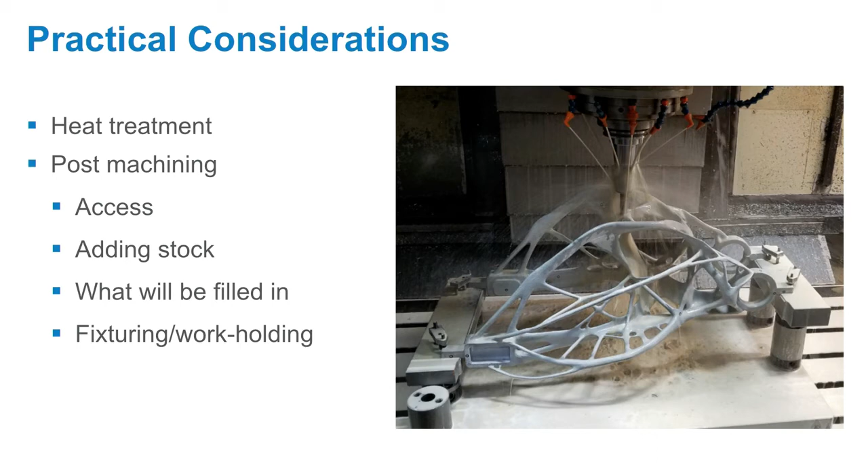One of the easiest ways to do that is just to throw some tabs that you can grind down afterwards. Throw those on some convenient locations. Another way to do that is actually to add some subtle flats that you can pick up with a bed of posts at known height, and you can make some fixtures. That might be a better approach if you're going to be doing more of a production run.

So in terms of feature size, the scale that you can work with sand molds.

One of the things that's interesting, unlike investment casting where you're constrained by building up the mold structure using fluid flow and can't access long, tortuous channels, we're actually able to print every surface here, so you can make these long, tortuous passages. You see a lot of integrated hydraulic lines, coolant lines, a lot of highly multifunctionalized geometry as a result of this.

You can see some free-floating channels or core structures there that will ultimately define fluid flow channels in this casting. Typically with sand, your safe space is working with both positive and negative features of 3 millimeters. You can certainly go finer, but that's starting to toe the edge of what's possible with this kind of synthetic sandstone.

One of the most exciting things is that these sand molds are basically like giant Legos. It's only 13 cents a cubic inch, so you can estimate the cost pretty quickly. You can design these mold components with as many alignment features as necessary to tile them together to make very large sand molds. At that point, the only limiting factor in how big the parts are that you can make is how big a ladle, how big a pot of molten metal you have.

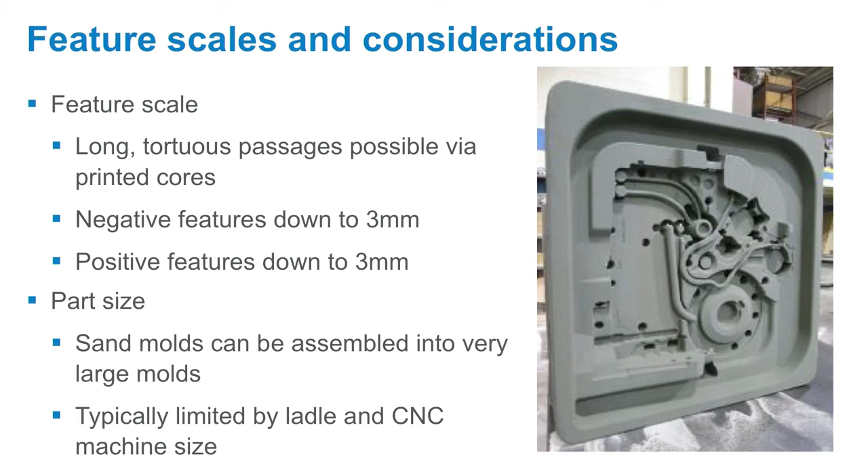And some foundries are set up to actually pour from multiple ladles. Tooling and Equipment International, the foundry we worked with for the hack rod and the swing arm, they can do about 2,400 pounds of aluminum in a single shot from two 1,200-pound ladles. So you're starting to work with some pretty big geometries, which is pretty exciting.

So just some takeaways. This is the big brother of the little part we've got up front. What we see here is that many of the same value propositions that have really been driving the conversation around metal additive are in fact possible with conventional metal casting techniques, when we define geometry using generative optimization and then use additive to make the mold components.

It's important to remember that unlike direct metal techniques, where we're still trying to figure out long-term and fatigue properties, all of that qualification work has already been performed for casting processes. So it's possible to very quickly make a qualified part using these technologies. There's a huge portfolio of materials, and you can go extremely large.